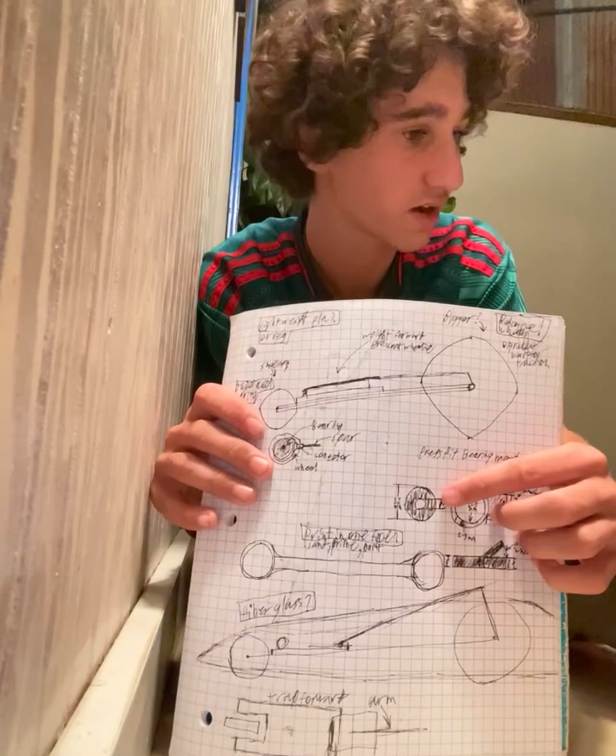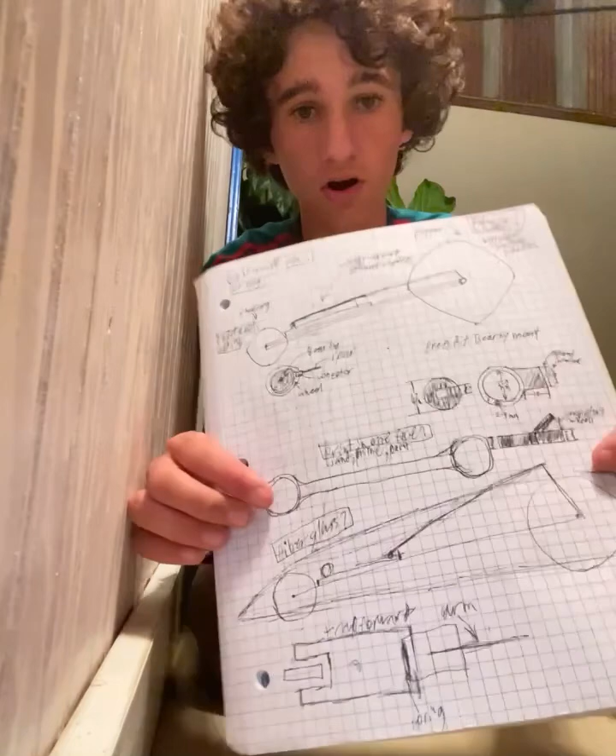I wasn't originally going to 3D print the whole thing, but was going to use wooden dowels and these plastic rings, I'll find one of them. This is actually the one with all the dimensions on it properly.

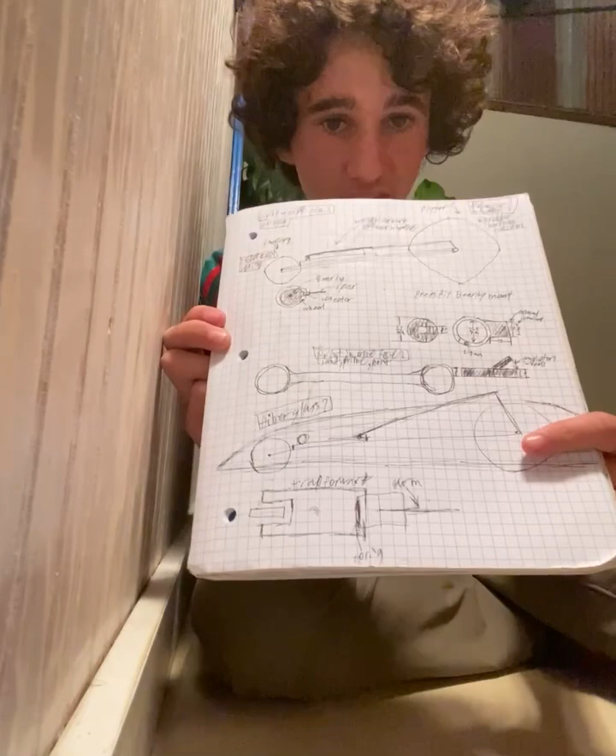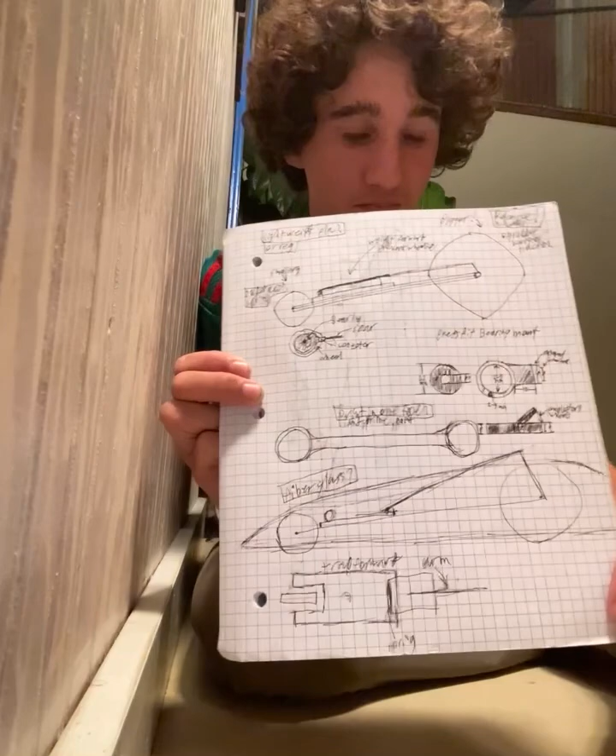I was going to make a full arm that was 3D printed with the rings incorporated into it. I'm not really sure what that was. This bottom version here is basically just this top version, but I came up with an idea to do a fiberglass shell over it so it'd be more aerodynamic, which is kind of stupid.

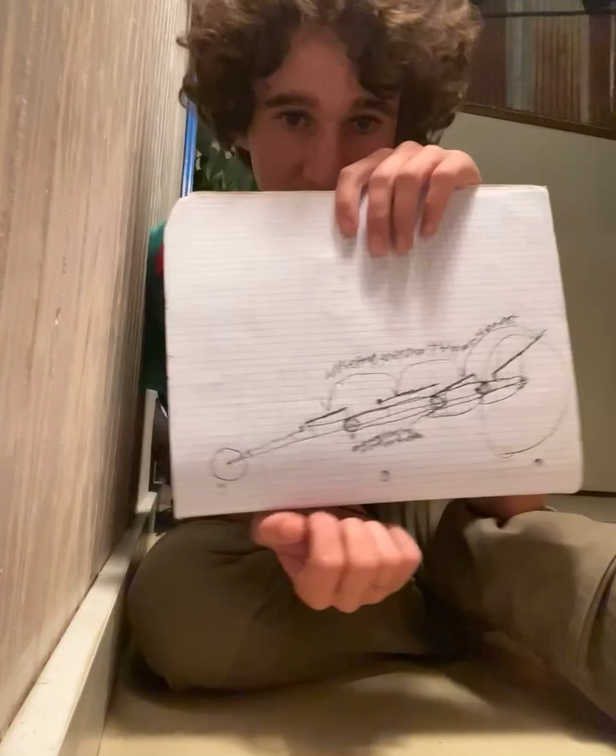So I came up with this other idea here, where it's basically my first version, but I have multiple mousetraps where each sets off the next, which I'm not sure how it would work. Also it does break the rules, so oh well.

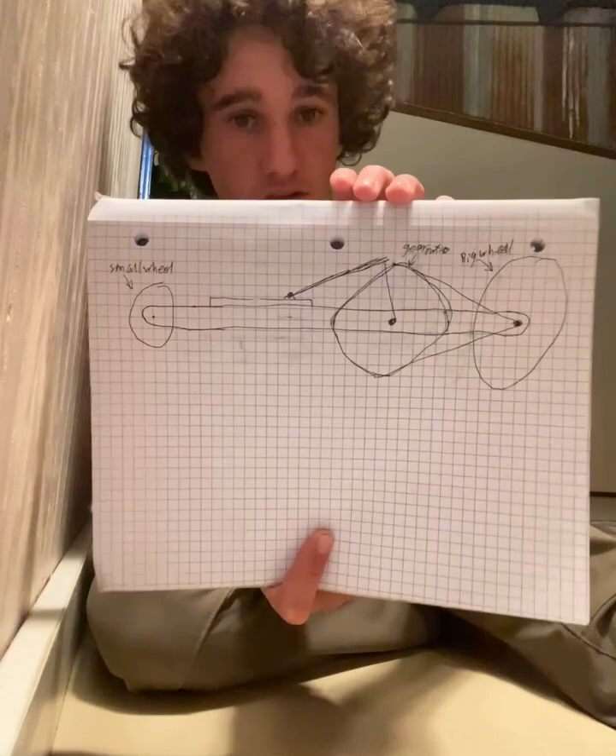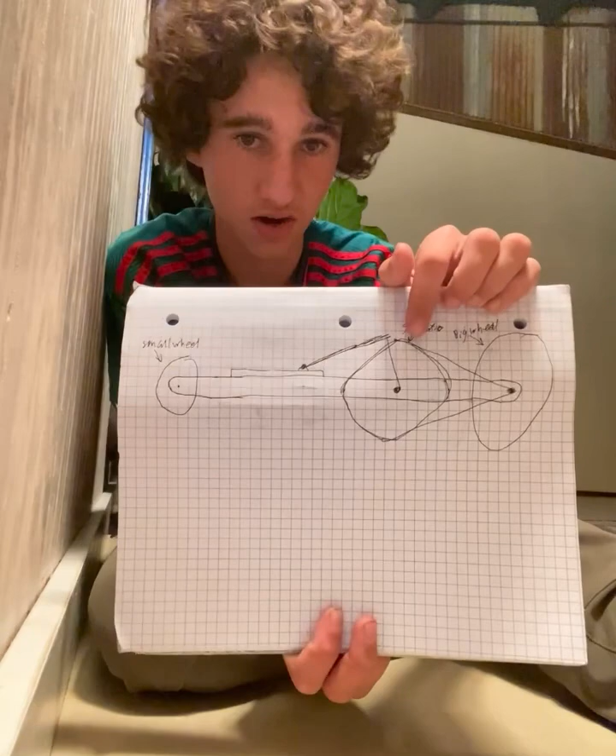This right here is my current design of what I used. It's my small front wheel, large rear wheel, except they're actually the same size in my actual version. And it uses a gear ratio directly from the mousetrap.

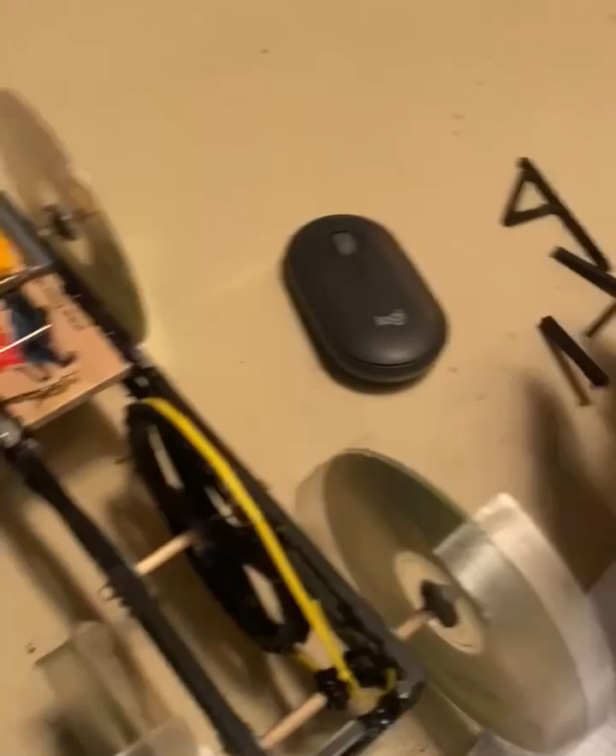This was my first version of my mousetrap arm, which is the actual version of what I have now. It failed because this piece here had issues where it broke off and just wasn't strong enough. Then we went to this version where it has the arm, and I made it too strong when I added this, which was kind of pointless and got in the way.

So I went to this version where it removed that arm, but it was still too short because it didn't go all the way across. It's basically this version here.

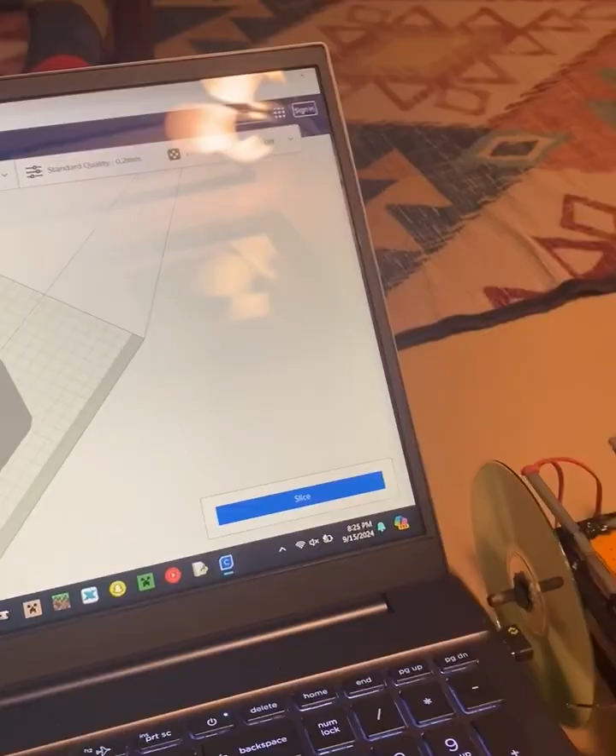Then I made it longer, and this is that piece where it goes all the way across. Here's the other half of it. So that first section I showed, and then this arm here.

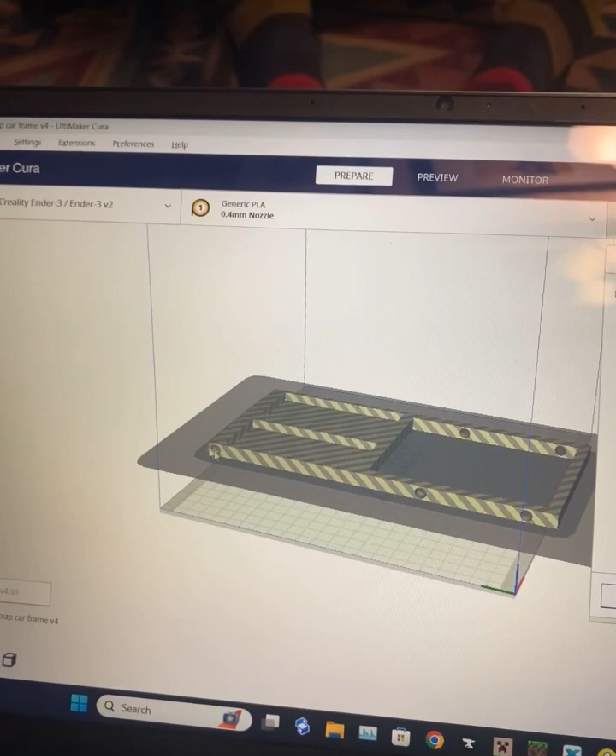This right here is the first version of the frame I've made. It's not particularly good, and it doesn't follow the rules, but it has two spots for mousetraps to be set in, a hole for an axle, another hole, and another hole here.

You can also see it's too big for the print bed, so it would have to be broken up. That's also what I did on this version. I can show in just a second. Here, it was this here.

You can see it's too long for my print bed, so I plastic welded right here and right here, and that caused some issues with warping and stuff, but it's mostly okay.

But before making that one, I had this part here, which was two halves that I also plastic welded, and I did print this one out. This is somebody else's design.

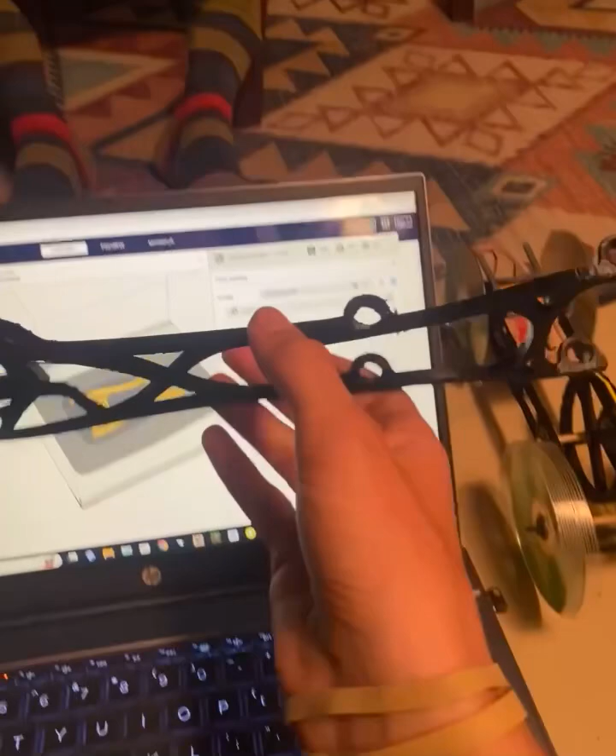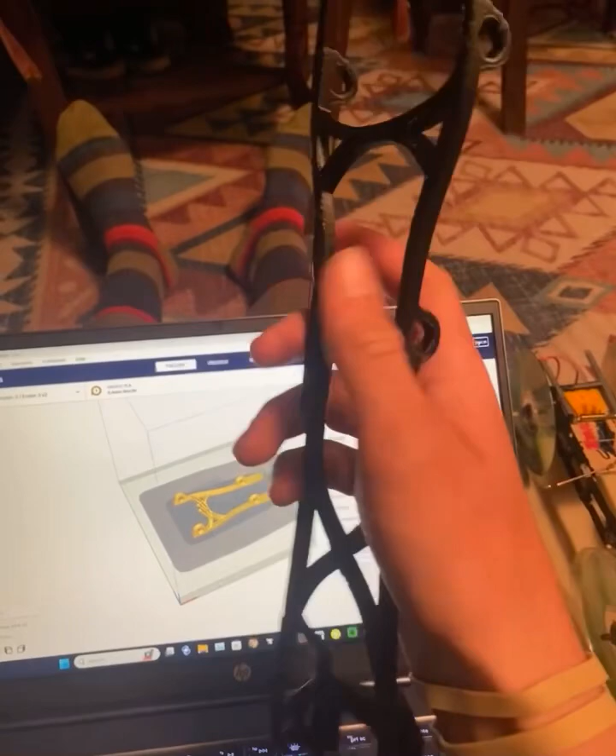You can see where I had some issues with it peeling off of the bed, and it messed with the shape of the holes. This side's fine though, and over here I do have some issues, but that's dealt with.

So this is the gear reduction wheel for this frame here that I had. You can see where the axle had gone through. Here, I printed it out. This is the part itself.

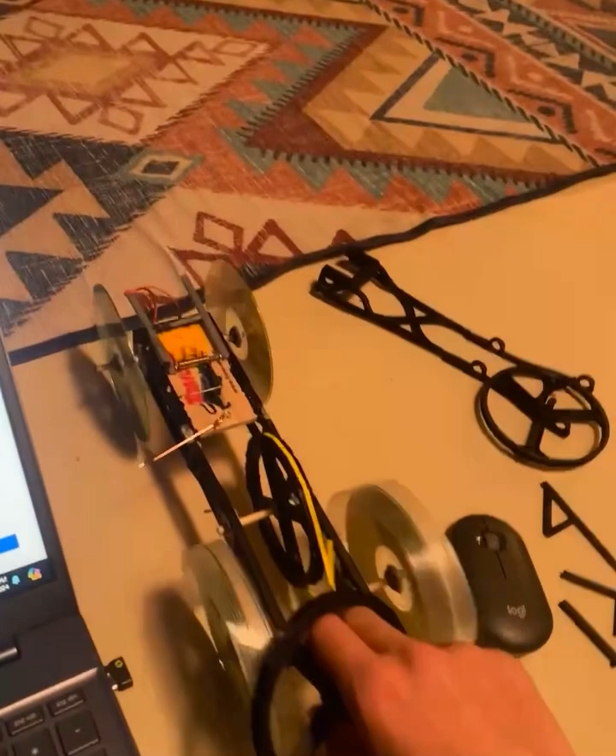For this mousetrap here, for this version, I used a different gear reduction wheel that I made myself, which, here's the original version of it, but I changed it.

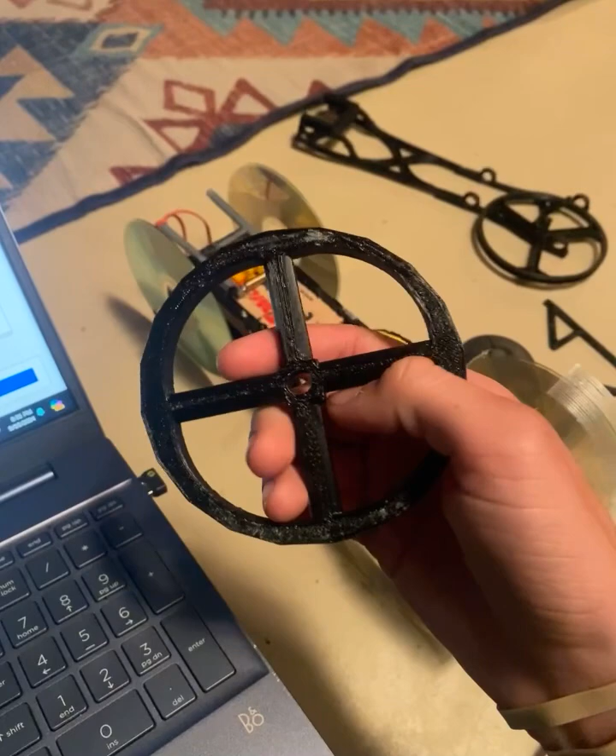I changed my spars, where instead of them being rounded with a hole insert thing in the modeling process, this was a square here, as you can kind of see there's the sharp corners. I changed it where it's a circle in the center, and these were just cylinders going out.

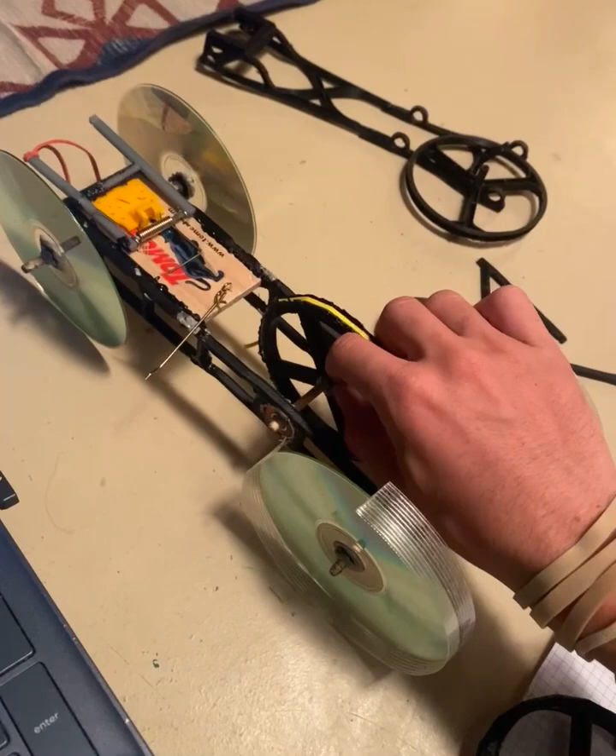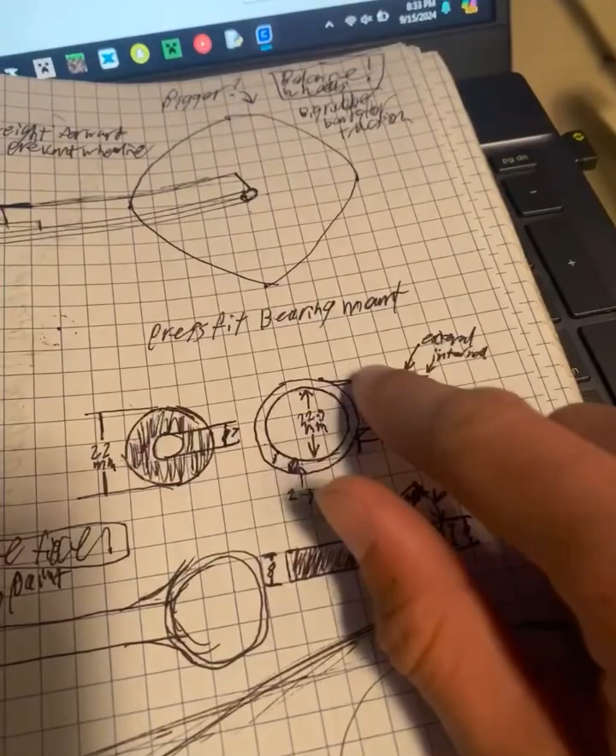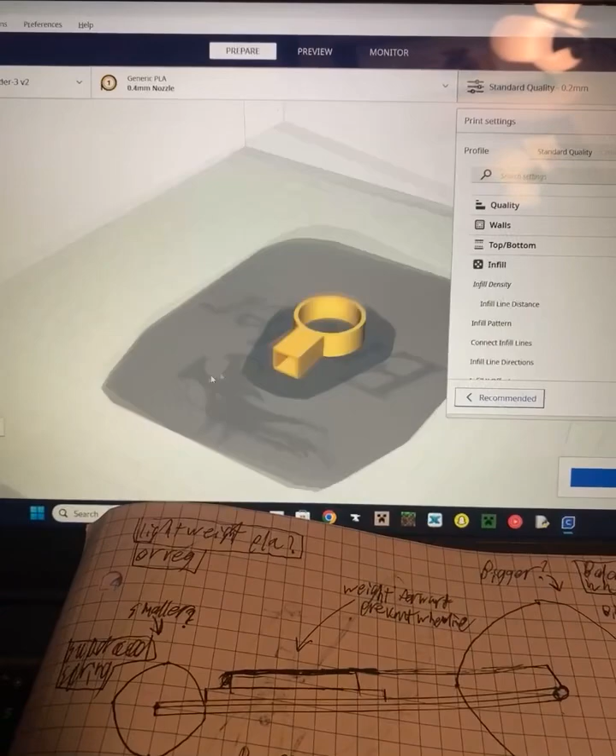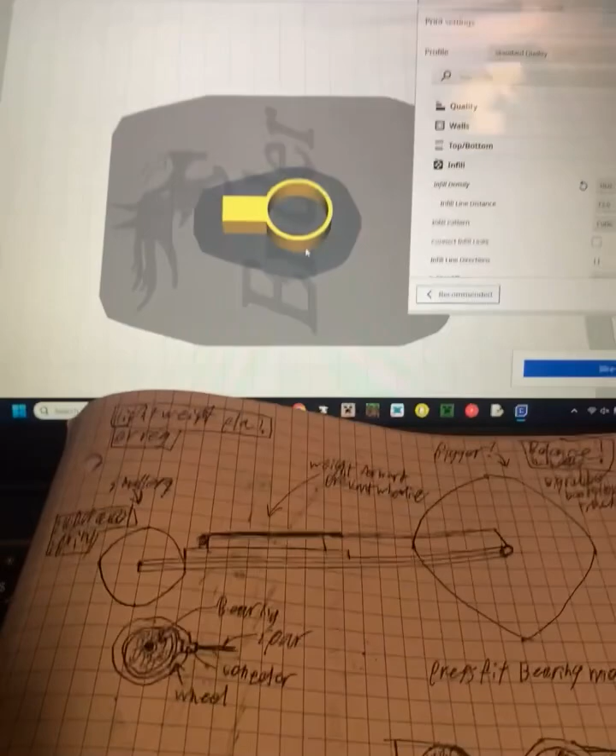So I've sketched up these pieces here, which is the bearing holder piece that I mentioned earlier. Here's another version where I drew a bearing into it. Here's the piece that I liked when I 3D modeled it. It's not particularly good, it's pretty simple, but it's just kind of a hole in there, and a bearing would be press fitted into it. But I printed one and decided not to use it because it didn't really print right, because I had these sagging issues here, where it's just a straight overhang and it just didn't work right.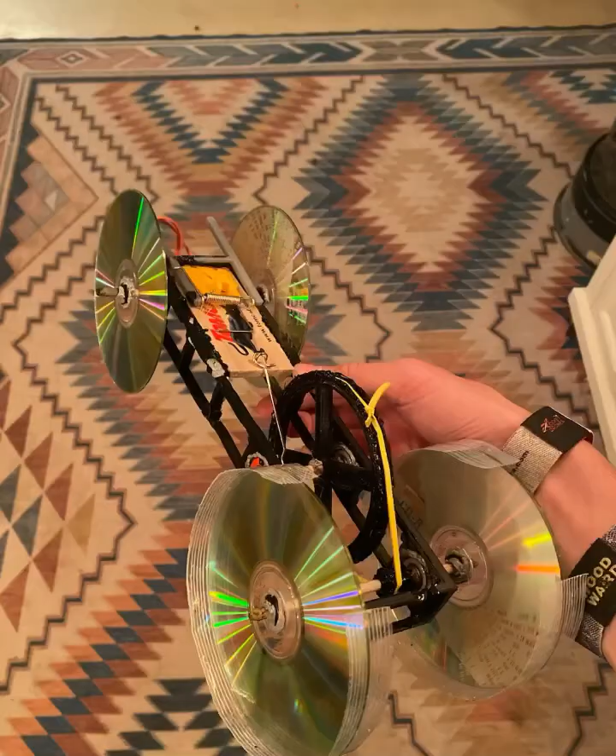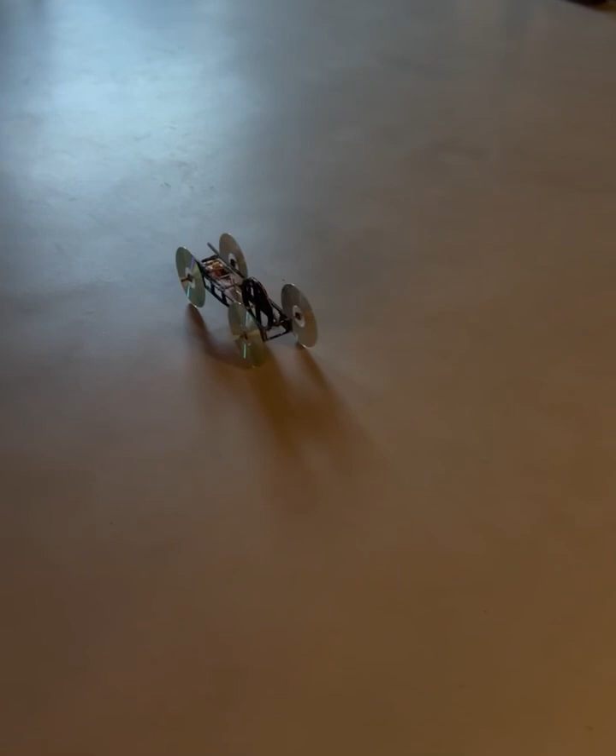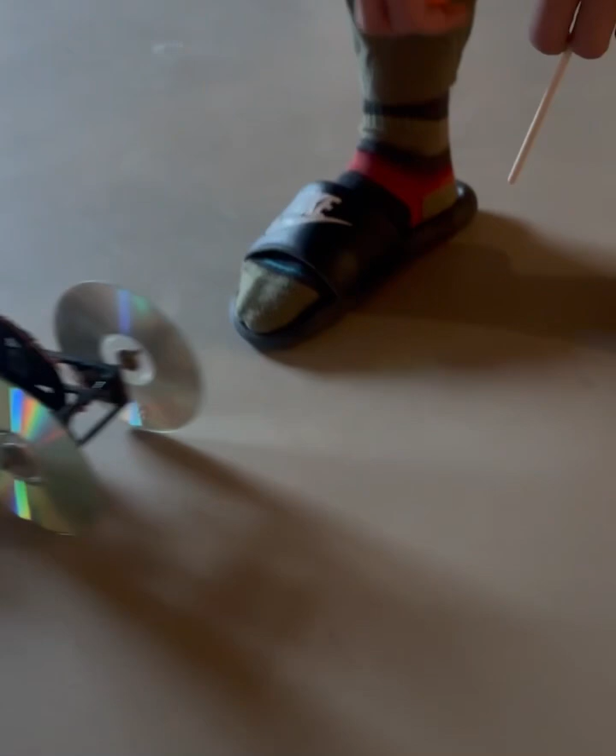So what went wrong? My gear ratio is shitty. How do you fix it? It's too heavy, and also this gear ratio here is... well, it just spins. You can watch if you want. It's nothing impressive.

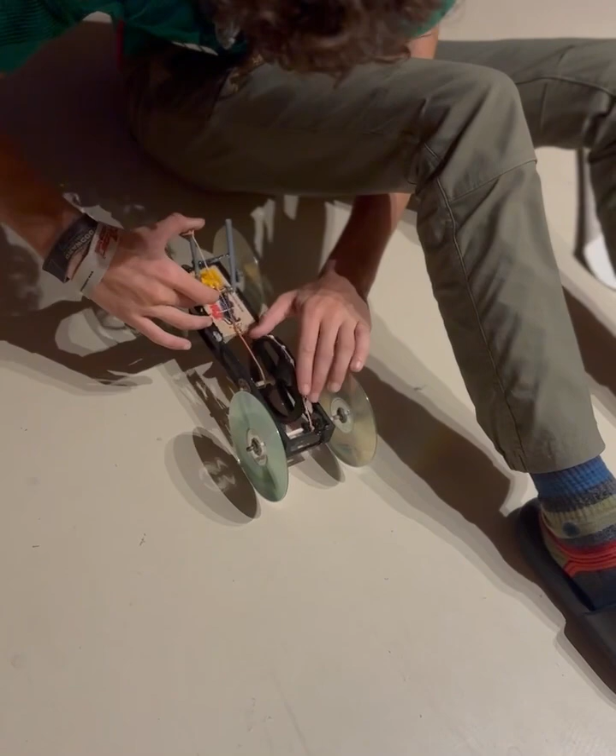You need more tension on that. Yeah, well, I've been trying to get more tension on it, but I just straight up can't. Well, so we need to try something else. I've been slowly adding more plastic down there, so it'll be slightly better. Where am I getting caught?

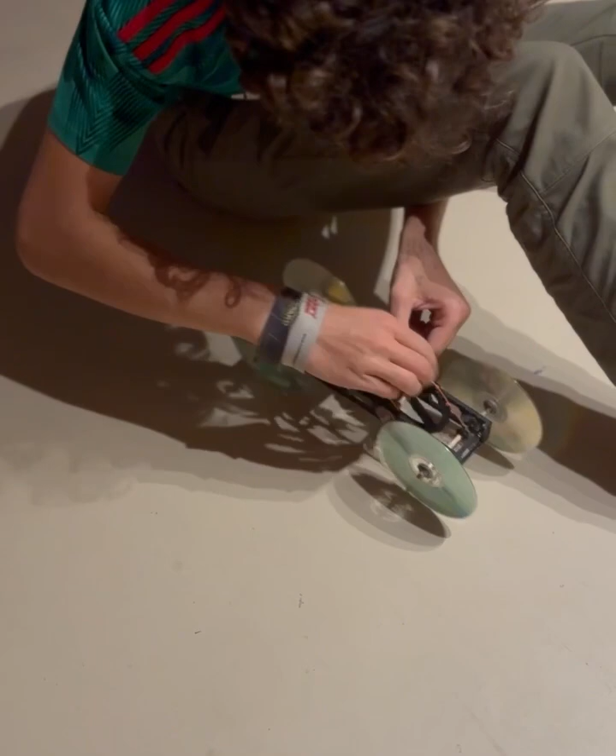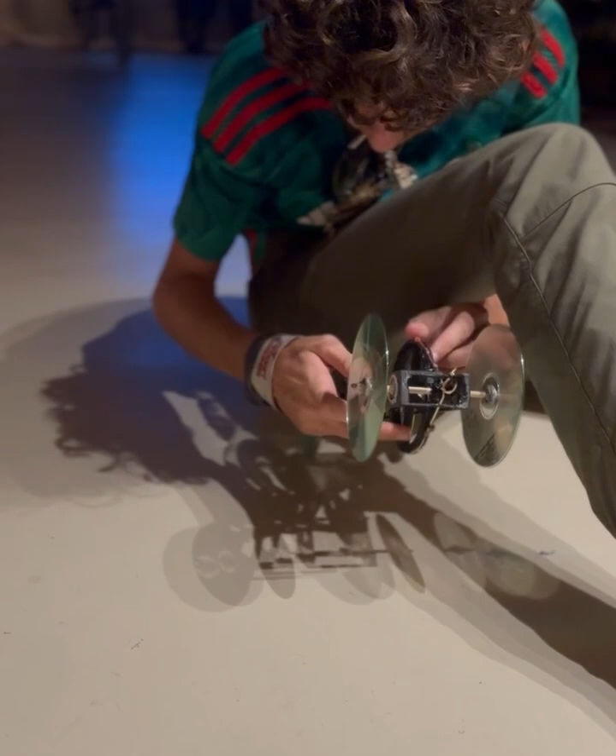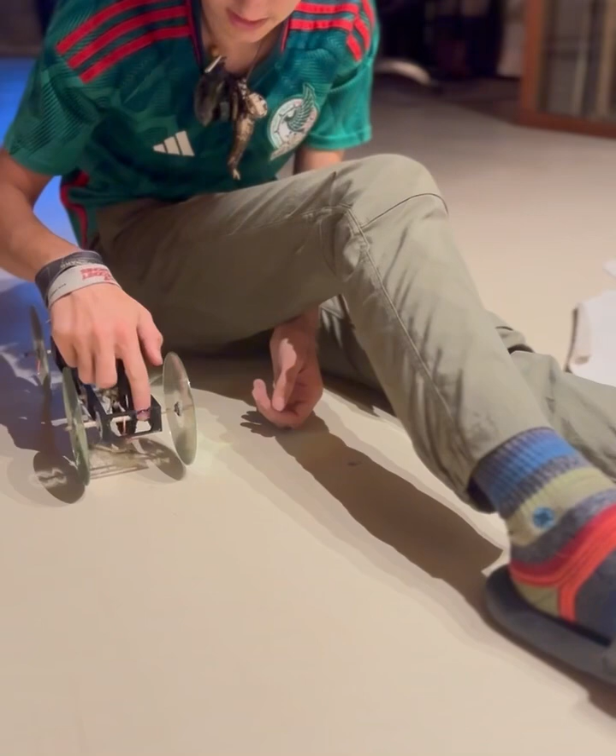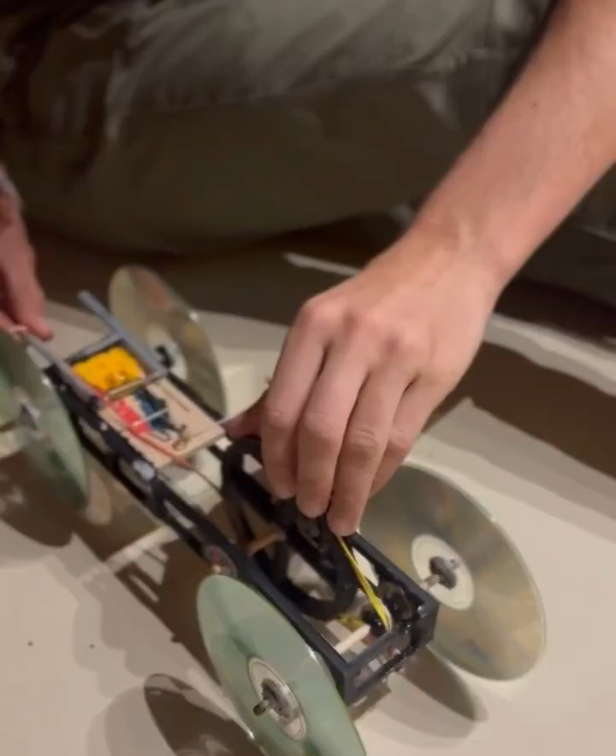It just pops right off. Okay, so what I'm seeing is that your wheel, your gear ratio, everything works except the wheel is not holding the string. This needs to get bigger. I'm slowly making it larger. Well, why don't you print a piece? It's just to get a piece on there because it's all melted plastic over here and here. It's not. Oh, you'd have to reset. So this here, this arm, this string around my finger. See, this part here isn't really getting a good grip on there.

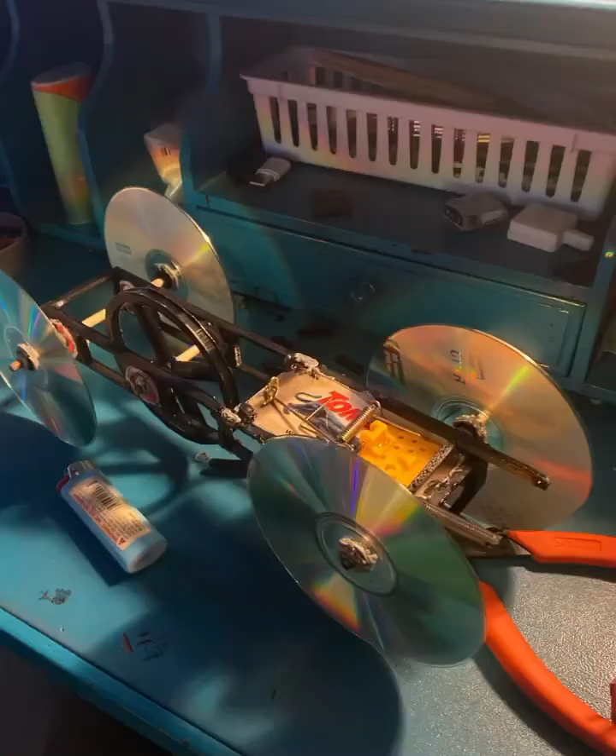So I originally bought these bearings, I bought a whole bunch of them. They're just cheap little steel bearings, and they really don't roll well. You just kind of spin them, they don't keep going though. They're just cheap steel bearings. I should have done more research originally.

Then I did a little more research and got these ceramic bearings, which came in a very nice case. I found very expensive sets of bearings, up to almost $300, I believe, was the most expensive I found. But these are about $20 for the set, and they spin decently well straight out of the box. This one I've been playing with for a while, and it just keeps on spinning. Now that's due to it being used - keep on just playing with it, it puts wear on it and loosens it up further. The downside is stuff can get in it, and sometimes it gets a little jammed, but most of the time it works perfectly fine.

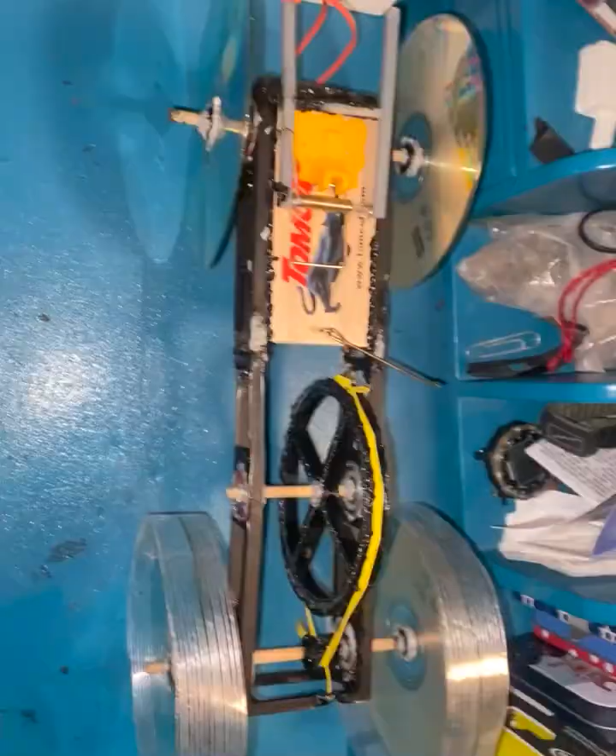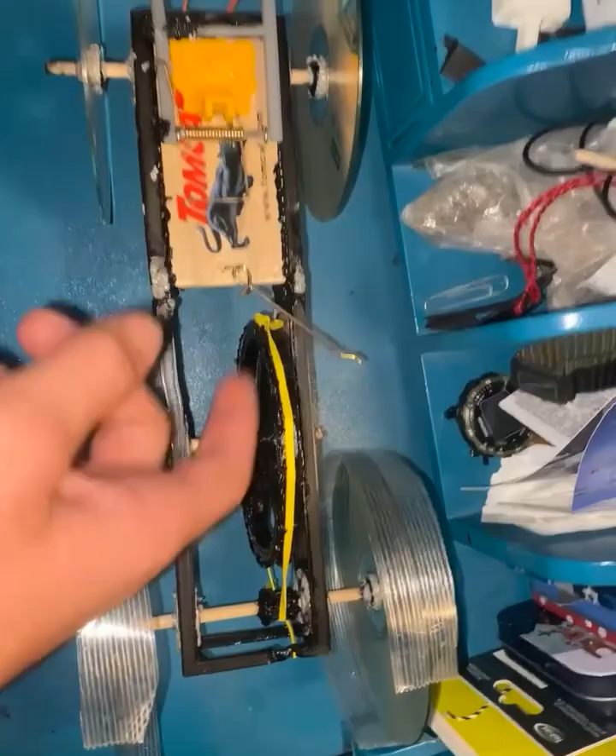So this is my final product of the car. You can see I have my arm here, and it connects - this is the plastic H-shaped piece. I need to change this out for a piece of string, because like rubber bands - it also stretches and causes issues. I just wrap it around here and tie a string across. We have our gear reduction here. It used a rubber band to keep tension, and we used CDs on each wheel.

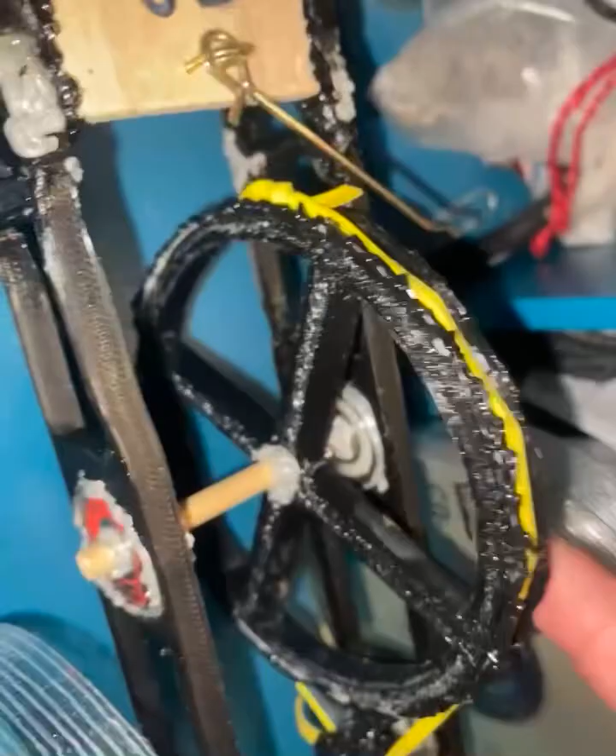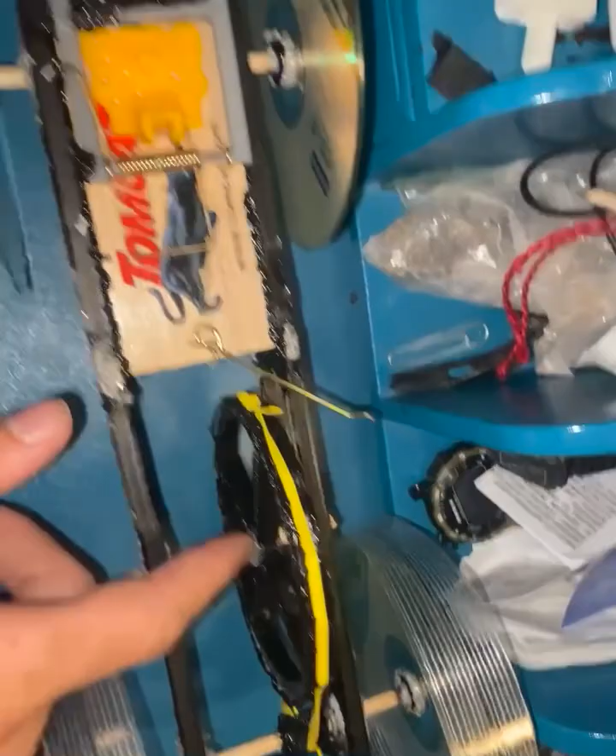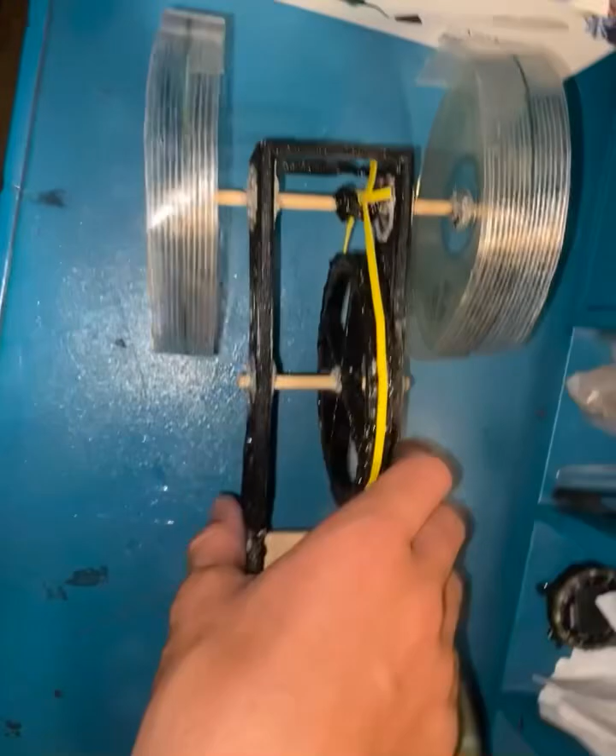There are bearings in between on all the axles here. I have tape around this CD for extra traction, but I'm probably going to remove it. These are plastic, just melted onto them to hold them in place, same here, to hold this in place. I melted plastic to hold this in, like the mousetrap itself. Flip it here, you can see the underside, which is pretty bare. It weighs about 0.4 pounds, so it's a little heavier than I'd like, but it's okay.